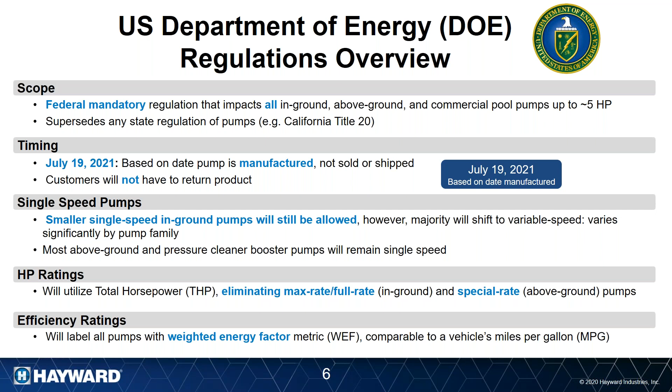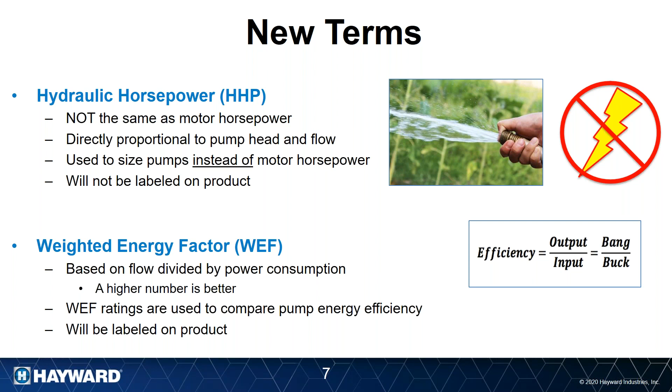There's the weighted energy factor metric I talked about. For those that really want to know, it's based off flow divided by power consumption. Takeaway is that a higher number is better. It's basically your bang for your buck, and like miles per gallon, the bigger number is better. And it's how you can compare. All things equal, you can compare two pumps and say, if this has a higher WEF, it is going to be more energy efficient. This will be labeled on the product on or before July 2021.

So this regulation covers a lot of ground, and it's easy to kind of get lost in the details, in the weeds, if you will. But to kind of step back and understand, the technical name for this regulation is, again, another acronym, Dedicated Purpose Pool Pumps, DPPP. So anything defined as a dedicated purpose pool pump is within this scope. It's important to note, I don't think I said before, this applies to anything sold into the United States. So it doesn't matter where it's made. If it's made domestically or international, it has to meet this regulation.

And I don't have a slide on it, but I'll speak briefly to the fact that this was a negotiated rulemaking. The industry, manufacturers, energy utilities, energy advocates, we worked with the DOE to develop this regulation. Like many negotiations, we didn't get everything we wanted, but we at least had a seat at the table. And so as an industry, we wanted to have product within this regulation, because if a product does not fall in this regulation, it's likely it would fall into some other general pump regulation. The DOE already regulates a lot of other industrial and commercial pumps. So there's a lot of different types of pumps within this regulation, which I'll talk about.

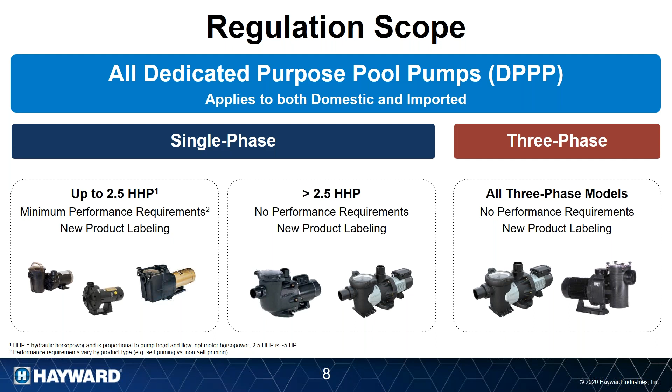But probably 95% of the market, or 90%, is in this category here. So this is basically everything else, and there are minimum performance requirements. So that's where I'm going to be spending the bulk of the time because that's where the biggest changes are.

Another important distinction that we learned early on in the negotiations, the meetings, is that the DOE won't create what's called equipment classes. Basically, they won't regulate based off application because their argument is, rightfully, that they're not in the backyard. So from a regulation standpoint, there's actually no distinction between in-ground or above ground. There's no difference between residential and commercial. It has to be based off some sort of physical parameter or characteristic that can be measured and quantified before it leaves the manufacturer.

So ultimately what we settled on was first the characteristic of priming. So if you go home and read this 500-page regulation, like I'm sure we all do in our spare time, a great cure for insomnia if anyone has that. But the high level is that instead of in-ground, you'll see the term self-priming. Kind of by definition, all in-ground pumps are self-priming. We did split that into two categories, called small and large, real high level there. I'll talk a bit more about that later and why that was important to break that out.

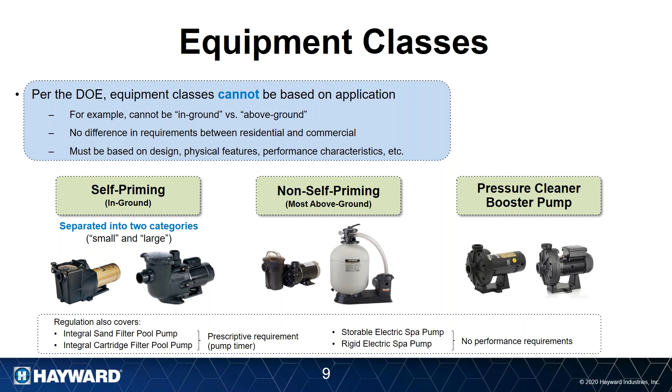So yes, it did start with the government ultimately at a state level, but worked its way up to a federal. And then it was a back and forth negotiation, a lot of meetings up in DC, a lot of back and forth on just how to create this. We had to educate the DOE on the pool industry, and then we had to align on what the criteria were. This part was pretty straightforward. It was time consuming, but ultimately it was working together to get to information. When I show later when we actually had to draw the lines in the sand on what the requirements were going to be, that's where the challenges came in. Right. Okay.

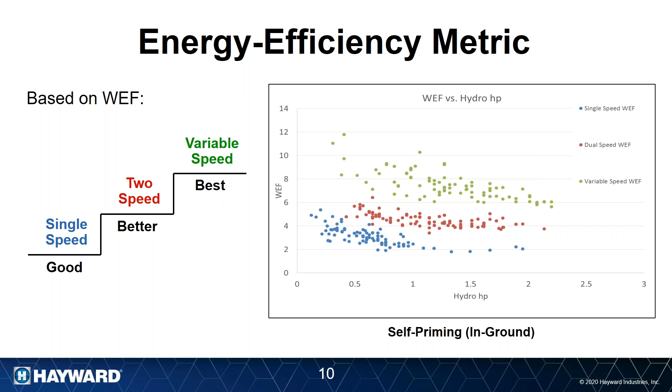I mentioned before that we broke up, this is, by the way, for self-priming, AKA in-ground pumps. We decided earlier that we wanted to separate in-ground pumps as small versus large, because we didn't want to have a one-size-fits-all requirement. At some point, when you get to smaller in-ground pumps, it just doesn't make sense. There's not as much energy to be saved.

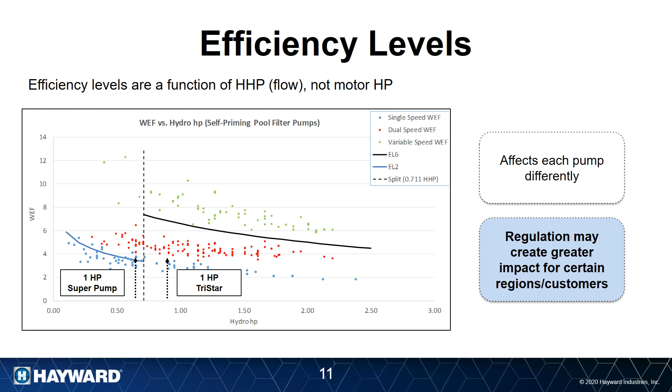But for those of you in California, I know, don't use a lot of Super Pumps. You may be using TriStars. Not as many of those will be single speed. So it really does depend on what types of pumps you're using, what types of pools you're building. So this slide, while not the most exciting because it's a chart, has far-reaching implications in terms of what manufacturers are allowed to build and ultimately what the trade's able to use and how it's going to impact every pump and every customer to some degree differently.

With that said, as we said at the beginning, there are going to be less SKUs. So ultimately, I think this is a good thing. I'm sure our distribution friends will be happy because, as manufacturers, we have a lot of pump SKUs, models. A lot of that is simply because of the max rate, full rate preference within this industry. And I have a slide about that later, but that goes away. So having the same product but with different horsepower ratings, that won't be allowed. So that in and of itself gets rid of a lot of SKUs.

And then of course, the single speed pumps, or any pump that doesn't meet the requirement, can't be made after July 2021. So there's going to be less models, less SKUs that Hayward and other manufacturers make. Ultimately, that can be a good thing, in that it reduces customer confusion, reduces stocking levels, etc.

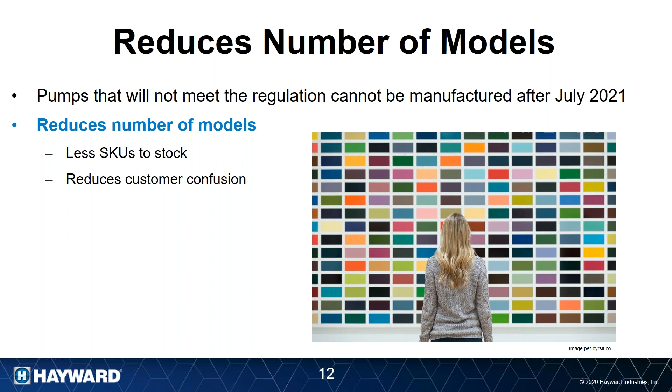So most everything I've talked about has been fairly general or common and applies to all manufacturers. And as an industry, we're wanting to get this message out through PHTA, et cetera, through Aqua. But ultimately, we as Hayward want to communicate what this means specifically for Hayward product, for our Hayward customers.

To do that, though, we are going to have to make some product changes. For instance, super pump, we're having to go to a 2-inch housing, probably change the impeller diffuser. But we have already identified a way to get it above that line so that we can still sell it. MaxFlo XL, same type thing, 1 horsepower and smaller. But once you move to those larger pumps, because they're more flow, you have less opportunity to meet those requirements.

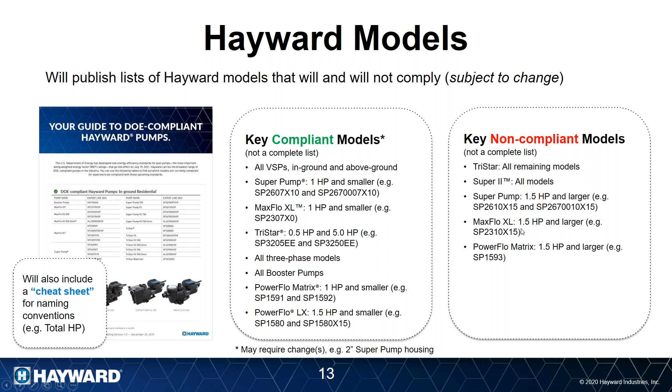Anything that's not in that middle list is on the can't make it list. So that's all the remaining TriStars, all of our Super 2s. That's an older design that doesn't have the hydraulic efficiency like TriStar. Super pump, 1.5 horsepower and larger, single speeds would not be allowed, and then the 1.5 horsepower PowerFlo Matrix. All of this is subject to change, and obviously as manufacturers, we're going to continue to do whatever we can to get these products compliant, and we'll continue to evolve that as we go forward.

So this just reiterates that concept that not all single speed pumps go away. This regulation absolutely will reduce the number of single speed pumps, but there's some high volume ones, particularly in the eastern part of the U.S., but in other areas as well, such as the 1 horsepower super pump and MaxFlo XL. Again, they may require some changes.

I don't talk a lot about above ground or pressure cleaner booster pumps in this presentation because really not much changes as it relates to the product. Most will remain single speed. We do have, for instance, variable speed above ground pumps, but the requirement from the regulation is such that we can still make a lot of single speeds.

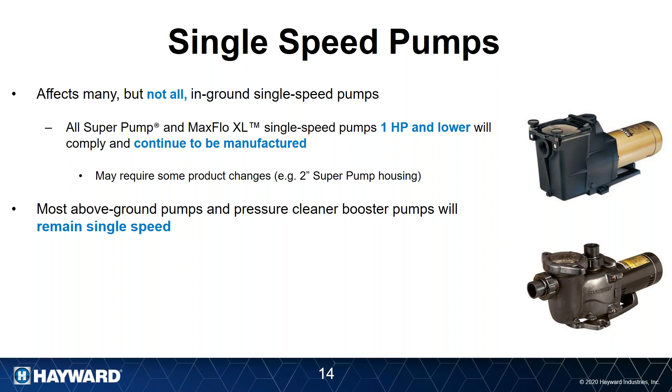Variable speed is going to become the most common overall, whereas variable speed is certainly the fastest growing, but still overall not the most common type of pump in the industry. It will become the most common going forward. And just to note, Hayward is very well positioned in that. As many of you may already know, we have a lot of different models of variable speed pumps of different sizes based off those different wet ends, the TriStar platform, the Super Pump platform, the MaxFlo, and then different horsepowers.

And the same way pool professionals for decades have been sizing pumps to pools based off whatever the pool needs, we do the same thing here. These are now variable speed. But Hayward has the most efficient variable speed pumps, 1 horsepower and above, per that weighted energy factor metric. So you'll be seeing that data, officially showing how efficient these pumps are.

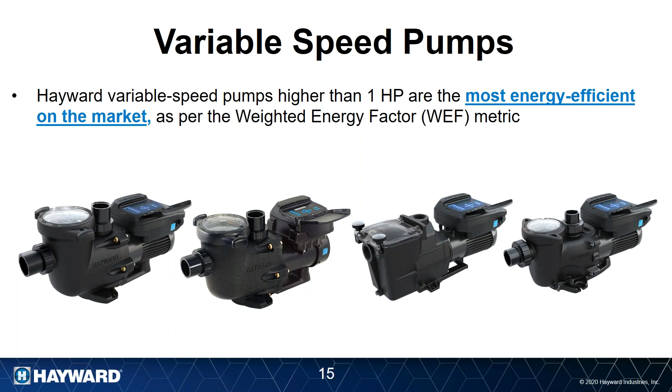And just to give you an idea of how that applies, you mentioned before, Scott, the Energy Star. I'll pause just for background again. Energy Star started in 2013. It's a voluntary standard. Energy Star is part of the EPA, which is separate from the DOE. A lot of acronyms there, but Energy Star is voluntary, DOE is mandatory. So Energy Star started in 2013, and at that point, 2 speeds or variable speeds could meet it. They updated their requirements in January of last year, such that basically only variable speeds could meet it.

But once the DOE regulations go into effect, the Energy Star is always the best of the best. There's Energy Star refrigerators and computers. Those are meant to be the most energy efficient products within the category. So once the DOE regulations go into effect, Energy Star knows they have to raise the proverbial bar. So they've already published their version 3.0, which goes into effect at the same time as the DOE.

And Energy Star 3.0 will basically award the best of the best variable speed. You can be a variable speed and meet DOE, but not meet Energy Star. All of Hayward variable speed pumps already meet those Energy Star 3.0 requirements. So again, just another way to show how we've given a lot of emphasis on energy efficiency, and now shown through that WEF metric.

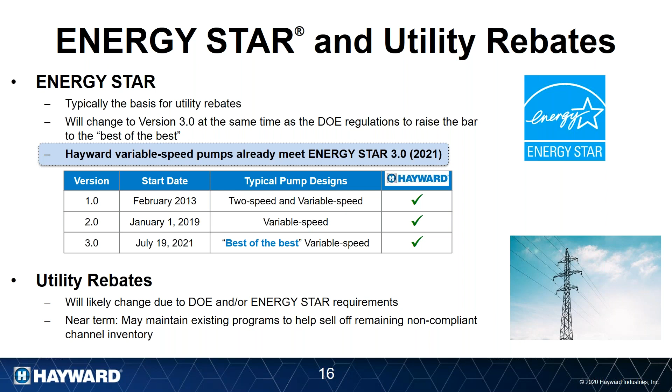It is important: everything I've talked about so far has been the benefits, and there are a lot of benefits of this. But note there are some unintended consequences of this regulation, because, as I mentioned before, the requirements don't vary by application. So again, different from, say, California Title 20, where those requirements are only for the filtration pump, the circulation pump, the main pump, whatever you want to call it. These DOE requirements apply to every pump. Doesn't matter how it's used.

So even if that pump is used as a non-filtration or auxiliary, let's call it a water feature pump or spa booster pump, it's still going to have to meet these requirements. And a lot of the time, especially for water features and spa boosters, by definition or by practice, those should be higher flow, higher horsepower pumps, which are less likely to be single speed. Pretty good odds you could end up having to put a variable speed pump on a spa booster. Well, there's pros and cons to that.

The benefit with a variable speed pump is you can dial in what you want. It's adjustable. You can adjust that visual, that sound, if you've got a laminar or a deck jet or something like that. But certainly from an energy efficiency standpoint, you just don't have as much opportunity to save energy there, because water features typically don't run that long, a couple hours a day, a couple hours a week. But that's just the reality of the regulation. It's not just the filtration pump, it's everything.

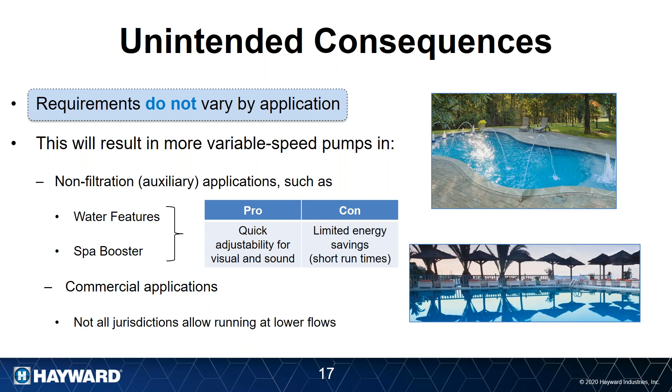And then there's commercial. Three-phase pumps are excluded, but there's certainly a lot of single-phase pumps on commercial applications, especially semi-commercial like hotels. And not all jurisdictions will allow a pump to run at lower flows. So we're going to have to work through that with inspectors.

As I mentioned before, the naming convention of these pumps fundamentally changes. As manufacturers, we're going to have to list pumps with the WEF, the weighted energy factor, and the total horsepower with a service factor of 1. So it changes how these pumps are named and eliminates, you may have heard the terms, max rates, up rates, full rates, special rates, all these different rates that we have. All that goes away. We can no longer modify the service factor and in turn change the horsepower. That service factor is fixed at 1.0, and so the total horsepower is dictated.

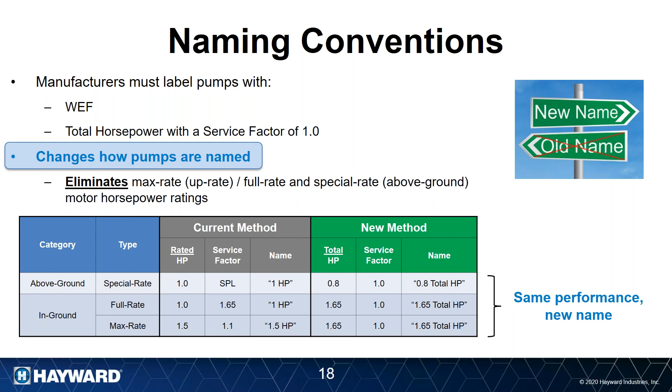Even our fundamental terminology is going to change. For those products that we'll still be able to make, same performance, but it's going to have a new name. So one of the things you'll be seeing from Hayward is basically cheat sheets to keep our naming convention straight, so we're not all confused, particularly when you're replacing products.

As it relates to timing, as I've mentioned, but just to emphasize, these regulations are effective July 19th, 2021. Those are based off the date the pump is manufactured, final assembly. So no product has to be returned. I just want to continue to emphasize that. So it's not like the world radically changes immediately on July 19th, 2021.

There'll still be product on our shelves and distribution shelves. You can still sell and install product as long as it's available. But at some point, if manufacturers can't keep making it, the channel, distribution, etc., will run out of product that isn't compliant. So use it as long as you can get it. But ultimately, as manufacturers, we have to make product that meets the requirement after that date.

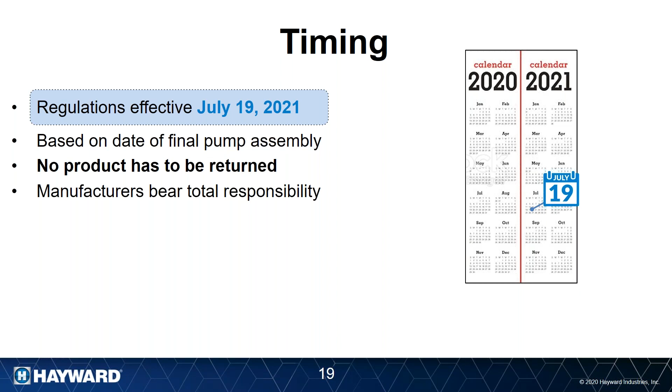We, as manufacturers, bear all the responsibility. There's no DOE police, but if they were to see product in a distributor or a dealer, it would ultimately go back to the manufacturer if it was deemed made after that date. But I just want to remind everybody, I could be guilty of it too, to think, well, 2021, that's next year. Well, that's less than 16 months away now. So it's going to be here before you know it.

And we're going to be coming up before too long with the next early buy. We're going to have to start thinking about, as an industry, what do we want to buy to prepare for these changes. So it's going to be here before you know it.

Scott, just to reiterate there, the way this will be controlled is they'll just shut down production of non-compliant pumps on that date. And that's kind of like the controlling mechanism. I was wondering, are they going to go into stores and clear pumps off shelves or anything like that. The way they control it is through stopping the manufacturing, correct?

That's absolutely correct. So nobody's going in and looking at what's already on the shelves. It's just as manufacturers, we bear the responsibility. We can't make it after that date if it doesn't meet the requirement. Gotcha.

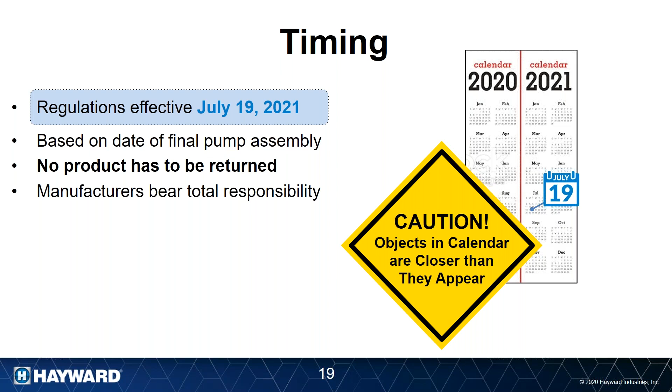It is important to note, this is probably the most common question I get: everything we've talked about today to this point has been about the entire pump, the pump assembly, the plastic, the wet end, and the motor. It does not currently cover the replacement motor. This was identified at the very beginning, but again, per process, DOE won't allow anybody to regulate a finished good and its components. You can't regulate the car and the fuel injector at the same time.

So the industry and the DOE are working on similar standards for replacement motors. And the reason for that, from a DOE standpoint, they want to do that to close what would otherwise be an energy savings loophole. If you can't install a 2 horsepower single speed pump, but you can still get a 2 horsepower replacement motor, it defeats the purpose from an energy saving standpoint. So the DOE has vested interest.

Obviously, as manufacturers of pumps, we're very keen to be treated fairly in terms of what could be required, pump versus motor. And then as a pool professional, if you want to install the pump, but the single speed is no longer available, but your competitor is able or willing to do the motor, then that becomes a challenge. So we want to even the playing field here.

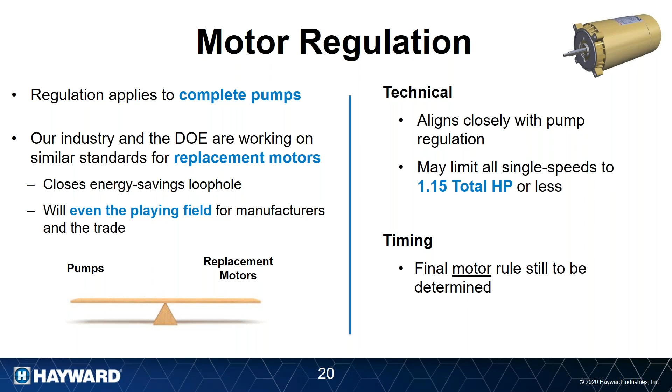So I'm going to pivot the last bit here to what probably a lot of you already know, but ultimately, how to sell these variable speed pumps. There's going to be more variable speed pumps and how to sell them. Certainly, first and foremost, the reason we're talking about all this is to save energy. And a lot of people, especially the homeowner, may not realize the pool pump can be the number 2 consumption of energy in the entire house after HVAC.

These pumps can consume a lot of energy. So with a variable speed pump, that's the reason they're there. It goes back to those WEF ratings and all the data and just our experiences in industry that variable speed pumps can save a lot of energy. But as you can imagine, variable speed pumps cost more than a single speed pump.

So I'll ask you, Scott, what's the first question you can imagine a customer is going to ask if you start talking to them about a variable speed pump? It's going to be, how much is this going to set me back, and why is this a good idea for me financially? Exactly. So how much is it going to cost? I mean, we're all consumers. We all think that way.

And especially if they have any experience with owning a pool, or if it's a replacement and they have an idea of what the pump might be, they kind of have a number in their head. So if you immediately respond with the purchase price of that pump, you probably dug yourself a hole, because in their mind they may be thinking, pick a number, $500, $600, $700 for a single speed. If you respond with $1,200, $1,500, you kind of already dug yourself a hole.

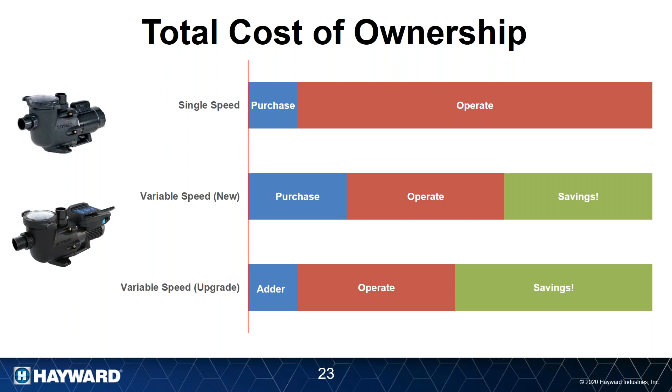Yeah, I think this is exactly it. It's a good way to kind of put it all together on one: the impact of owning the pump, not just buying the pump. And in a case of, but wait, there's more, there are other benefits, compelling benefits of running pumps at lower speeds. Energy and saving money, often the most important, but probably a close second.

And depending on where you are and how close you are to your neighbors, the quiet operation is particularly important. Running these pumps at low speeds, it is incredibly quiet compared to a single speed pump running wide open all the time. So you have that benefit as lots continue to get smaller and smaller. A lot of consumers' neighbors are happy that these pumps don't have to run 100% all the time.

And then the other benefits of running at a lower speed, kind of slowing things down: better filtration because you're not blasting, say, a cartridge or DE at full speed all the time, less stress on equipment. And then usually you're going to run these pumps longer, a little bit counterintuitive, but instead of running a single speed pump 12 hours a day, which means the water is stagnant the other 12, with a variable speed pump you can run it in many cases 24 hours a day, but at a low speed, and you're still able to keep the sanitizer, the salt system, or the chlorinator running.

One analogy I borrowed from somebody is, it's like having a car with a gas pedal. A single speed pump is like having a car that only goes 100 miles an hour, which sounds like fun, but isn't the best for your engine and not the most fuel efficient. With a variable speed, like I said, you really dial that in.

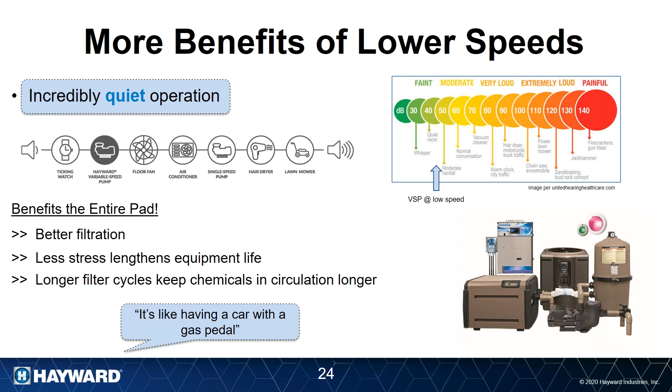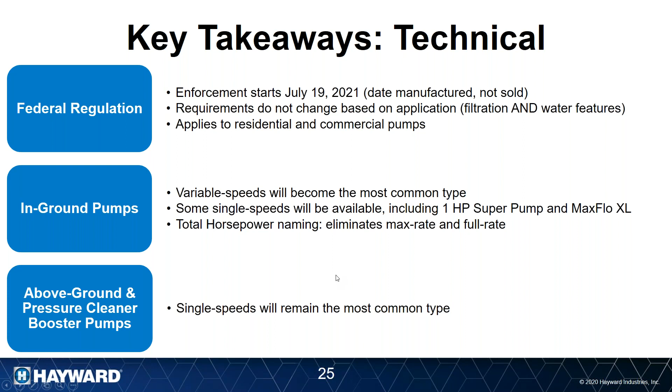On the in-ground side, aka self-priming, variable speeds will become the most common. But also recognize that there will be single-speed pumps that will still be available, for instance, the 1 horsepower Super Pump and MaxFlo XL. We're going to have to change the name. I'll put it here under in-ground, but actually this applies to everything, going to the total horsepower naming convention. And again, as I've said before, not too much changes product-wise as it relates to above ground and pressure cleaner booster pumps. They'll still remain mostly single speed, at least by the regulation.

On the customer side, communicating the benefits, why they should want to use this new, often variable speed pump, selling those benefits. It's the lower cost of ownership, or the other way of looking at it, the total cost of ownership, and it will be lower. You'll save more money with a variable speed pump in most cases. The quiet operation, the other benefits, feel free to borrow it as well: it's like having a car with a gas pedal. As we said, again, no, you don't have to return any product.

So your immediate business doesn't have to change on July 19th, 2021, but ultimately it will. It's going to level the playing field because this impacts everybody. It doesn't matter how pumps are sold. We all have to meet the same requirements, and especially once the motor regulation goes through.

And it's a little bit cliche, but I'd be remiss if I didn't say that this is a win-win-win scenario. We shouldn't be bashful of the fact that we, as manufacturers and distributors and dealers, pool professionals, are selling a more expensive product, the variable speed pumps, and the homeowners are getting benefits. So we don't have to hide the fact that we're able to make more revenue, more profit with a product that ultimately is going to help the homeowner. And then, it wouldn't be a presentation without some sort of cheesy quote at the end.